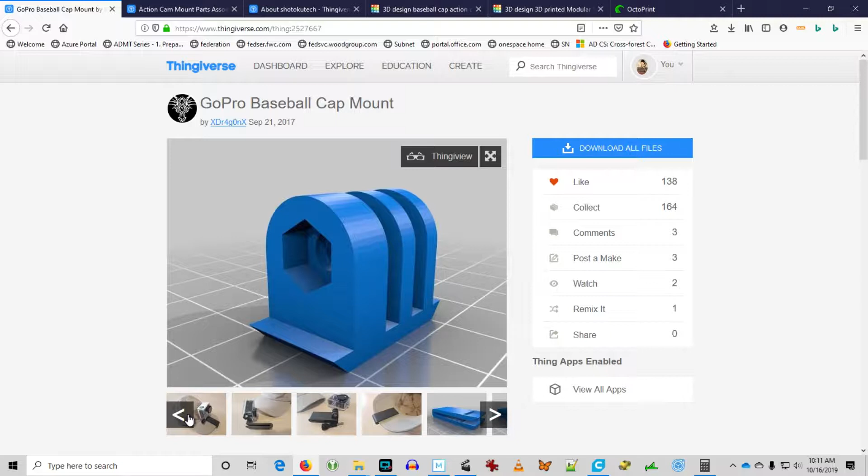We're back on Thingiverse here, and I was looking at this GoPro baseball cap mount, and it's pretty cool, except I'm not going to use the waterproof case. I'm just going to use a small cage that comes with my action cam. And I also want the camera a little closer to the end of the brim.

So we're going to use this clip from this design and use this triple head mount from this action cam mount assortment, and we're going to mash them together and come up with our own new baseball cap action cam mount. And here we go.

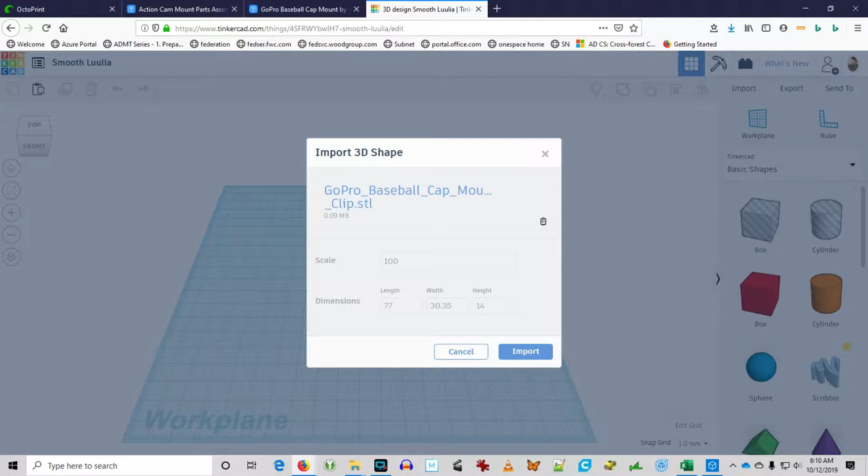So on Thingiverse, in most cases you can download individual parts of a project. So in this case we're just going to get the clip, we'll download it, and once we see that it's down, we can go into TinkerCAD and import it, just like this. Select your STL file, import, and there you go. We have our clip in TinkerCAD now.

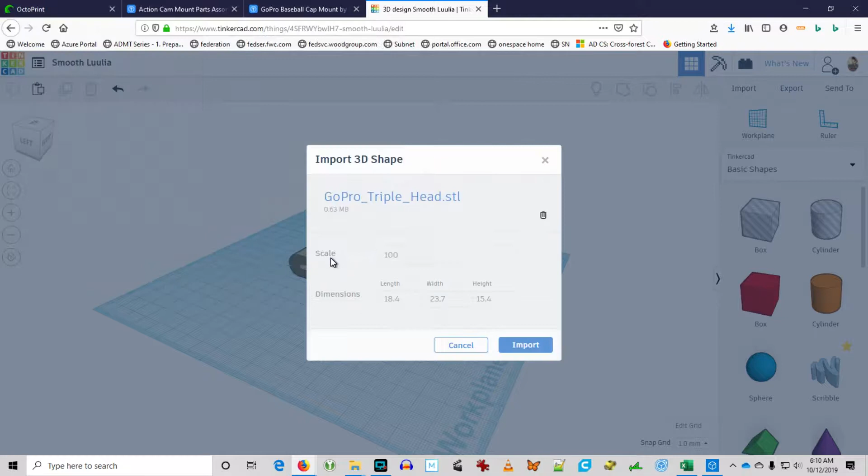Let's go get the triple head mount. Same thing here, download, import the STL file, and there we go. We have the two pieces to our puzzle, and now we'll start to manipulate them. So first we'll want to get this rotated and oriented in a way that we want it, turning it upright.

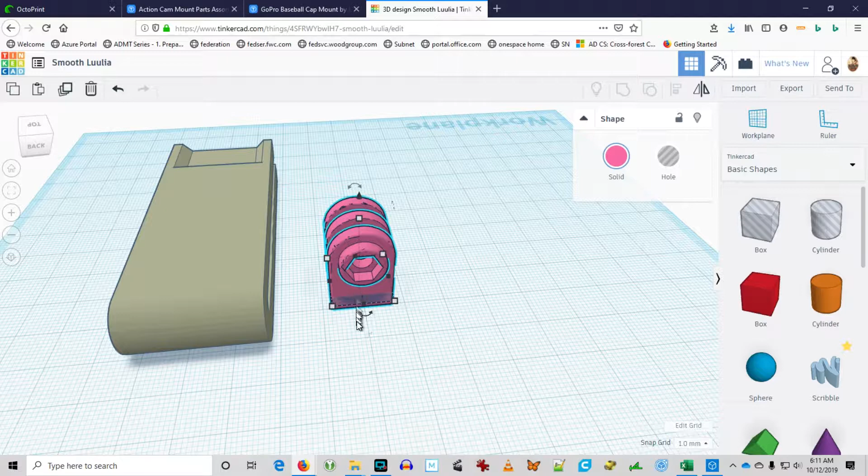I'm going to get the measurement here. We got to raise it 14 millimeters to sit on top of the clip. Finish rotating it, raise it up that 14 millimeters. Trying to gauge some of the other measurements of this object here. The tines and the grooves all appear to be about 3 millimeters thick, and I'm just trying to figure out how wide I should make the clip.

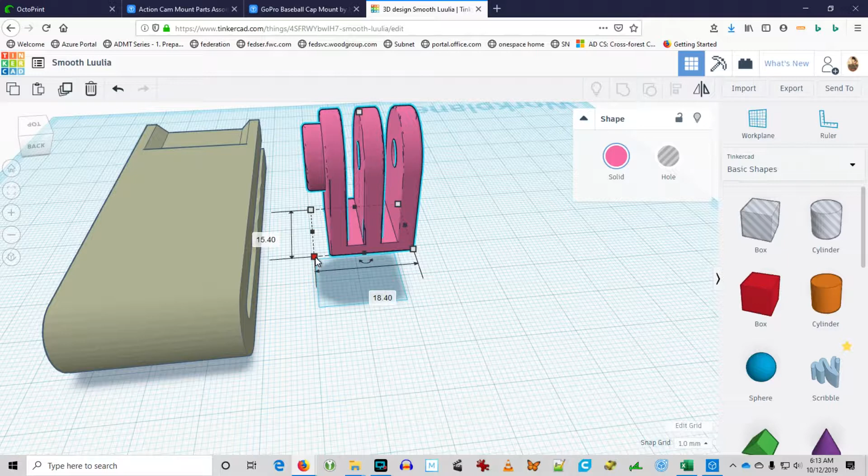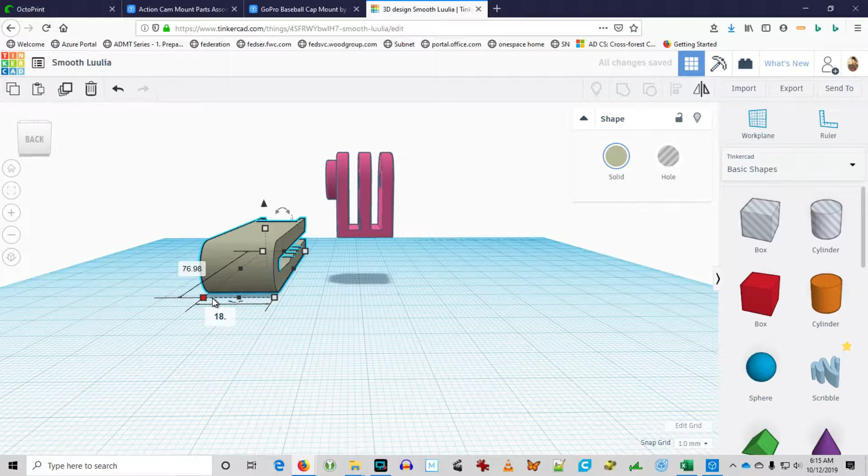So I'm just having difficulty making up my mind. Do I want to make the clip the 15.4 or the 18.4? Notice that there's that nut carriage that overhangs about 3 millimeters off the side of that bracket. So if I make the clip 15.4, that's going to hang over. If I make it 18.4, it's going to be contained within the width of the clip. But let's see which one works out the best.

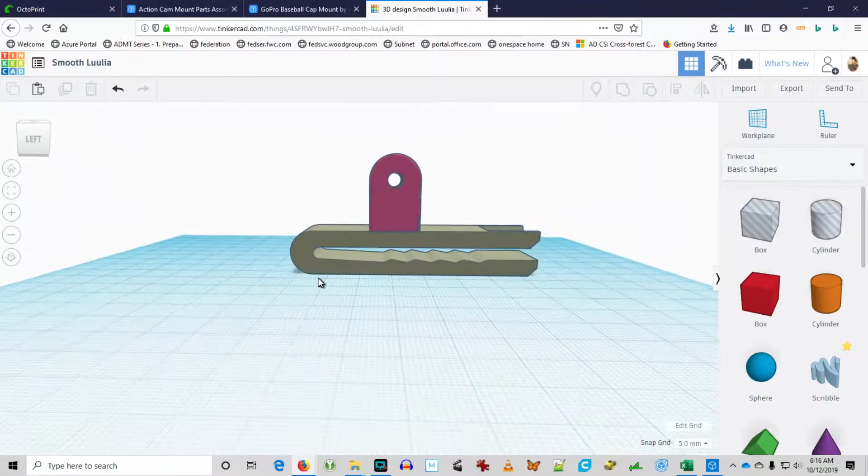The clip being 18.4 wide would cover the whole width of the mount. We'll center, and I'm gonna knock that back about 20 millimeters so that it's not on the end of the brim but not all the way up against the head of the cap. That looks about right. Let's see how this looks.

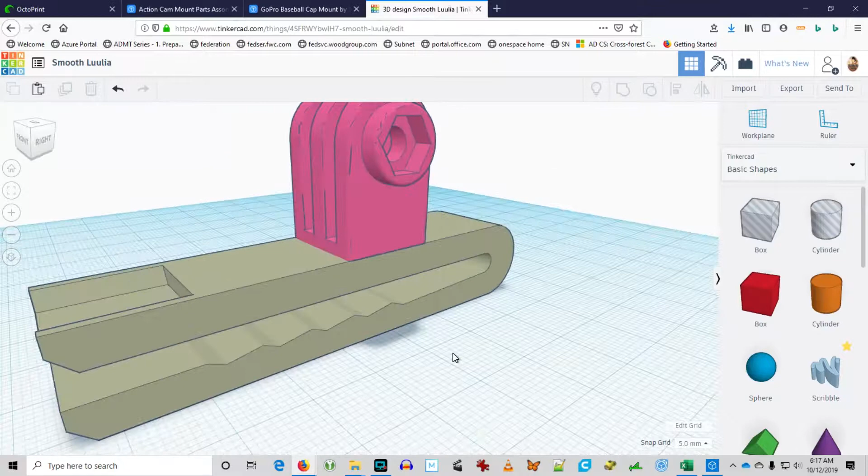And that just looks awkward to have that clip that wide just for the nut carriage there. So I'm going to go ahead and knock it back down to 15.4. That seems to make a lot more sense visually. I'm still in my mind trying to figure out whether I'll print this vertically or lay it on its side. Remember, everywhere there's an overhang, you're going to need to print extra support material.

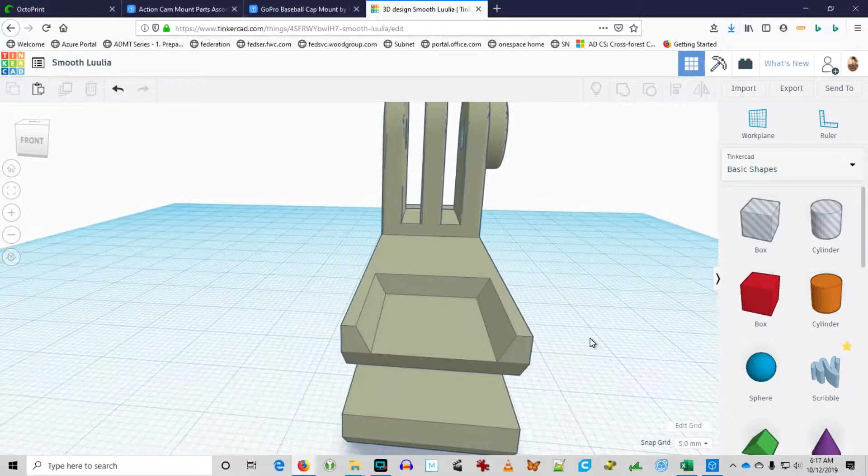Now, cleaning that support material out of the clip will be a real chore, whereas cleaning the support material out of the actual mounting bracket could affect the precision of the mounting bracket. So I'm just kind of eyeing things, trying to figure out what I'm going to do. I also want to take that divot out of the clip, the divot where the original poster was going to glue a triple head mount. So let's see if we can fix that up.

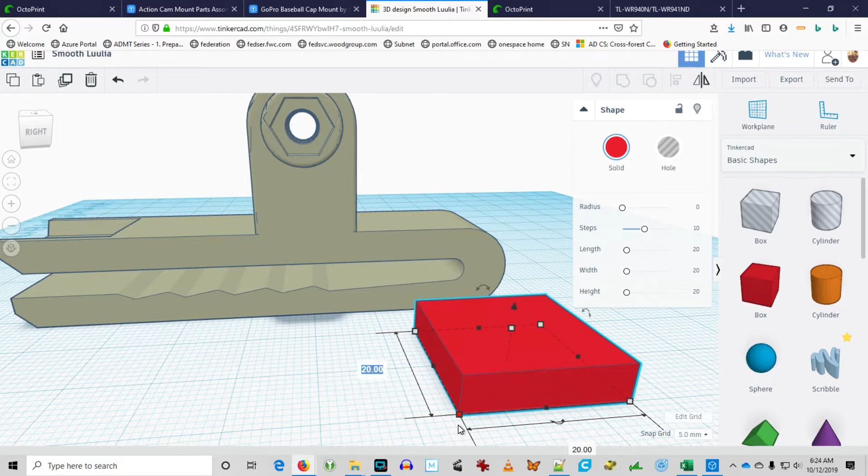Yeah, we'll just get a rectangle here. We know the dimensions, 15.4, and I'm going to estimate that it's about 5 millimeters high. That looks about right. I want to get the mount out of the way while we're doing this. So we'll center and match the top height. That looks perfect. We'll group those together.

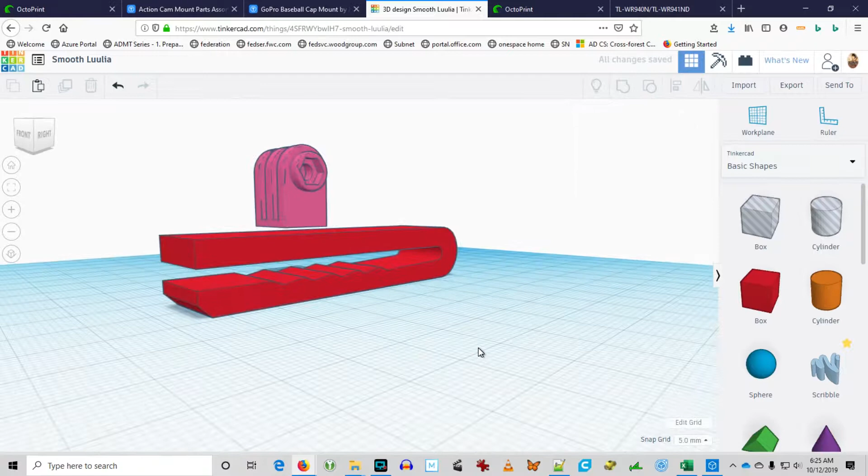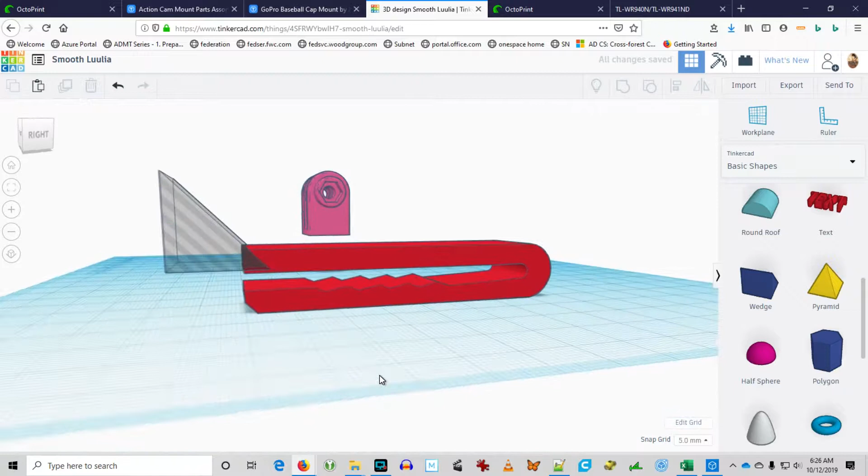I don't like that square end. I like that little angle notch cut out. So let's go ahead and take care of that right now. Bring in a little wedge. I don't need to change the measurements too much. I just need to get it over there and get it in place. Let's turn it into a hole. Center, extreme, and we'll do a little manipulation, sliding things around a bit.

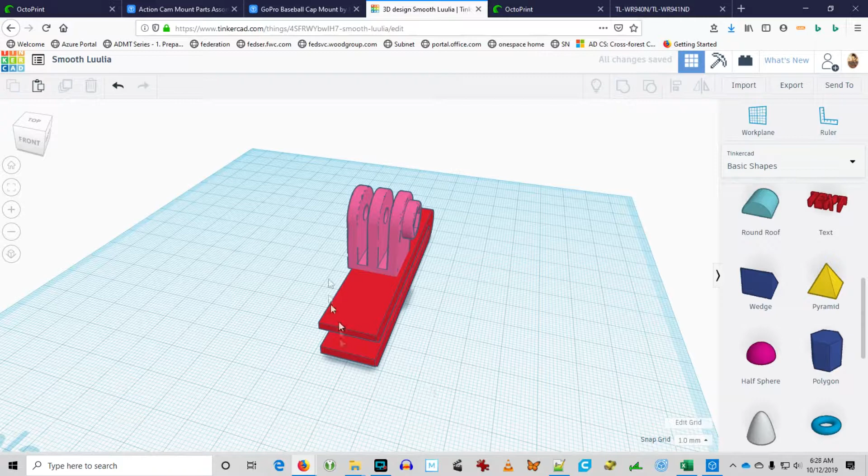Getting closer. And we got to go down a little bit. That looks good. We'll try again. Perfect. Let's group that. There, we got that nice little angled notch back. Now we can finish the assembly here. Center. Line things up. And we'll group it. Okay, there's our finished part.

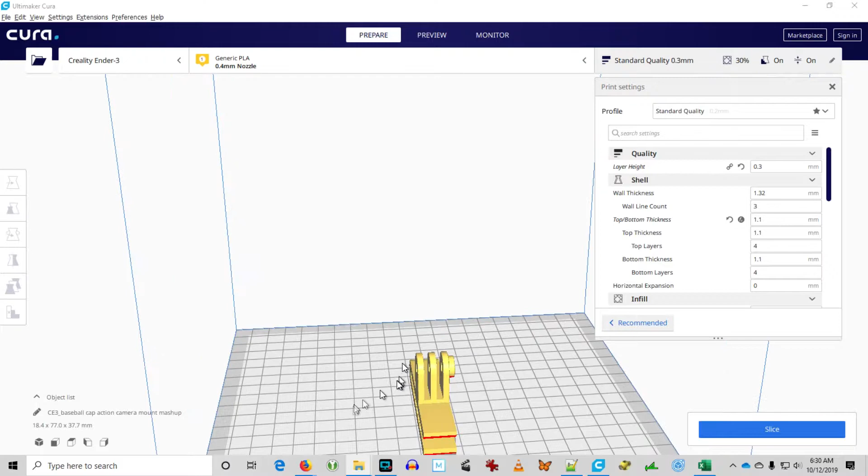Okay, let's look at our slicer settings in Cura. So we drag and drop that in there. The first thing we're going to want to do is rotate it, lay it on its side. I've decided that it would be better to clean the support out of the mount rather than clean the support out of the clip. Okay, let's look at our print quality now.

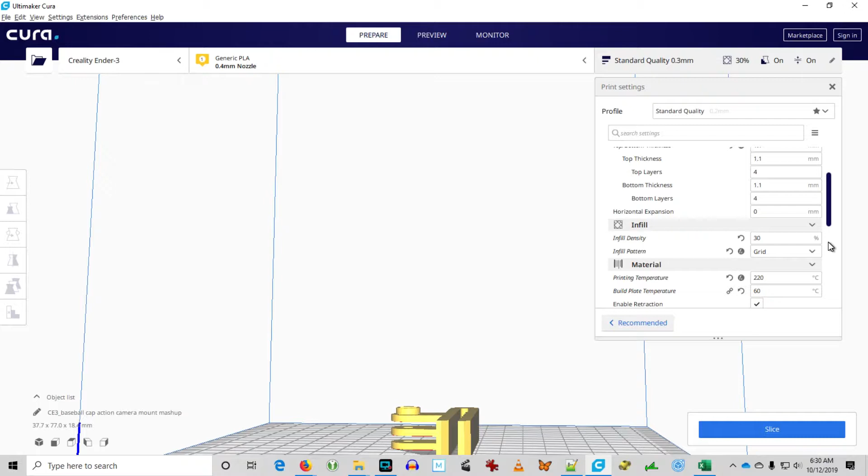You have 3 wall line count, top and bottom thickness is 4 layers, and we're printing at 0.3 quality, so this is a real draft mode. Infill density is 30% with a grid pattern. I'm setting it at 220 and 60. That's what my PLA is going on the Ender, but I'm going to print this in ABS on my Anet. So I'll just manually adjust that in OctoPrint.

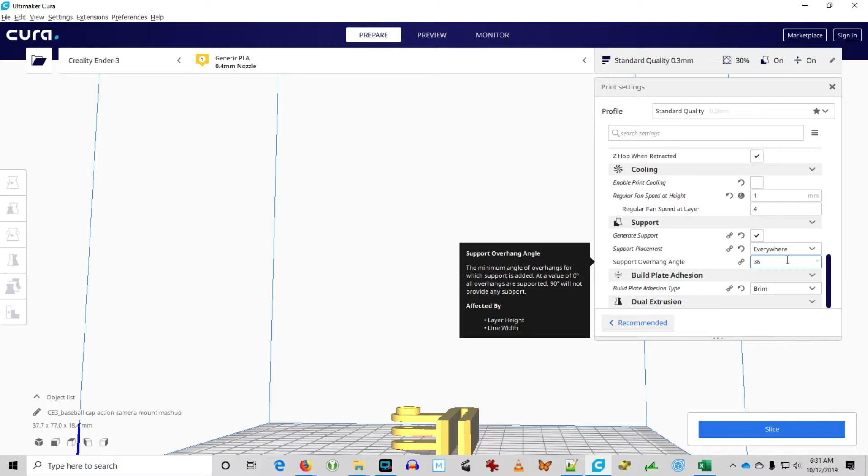We want support everywhere. I've turned the cooling fan off because I am going to do this in ABS and I don't want a bunch of warping. ABS prints at a much higher temperature than PLA. Okay, we're ready to slice. We'll save that file. Now we're going to go into OctoPrint, and you'll see I'll manually adjust the temperatures.

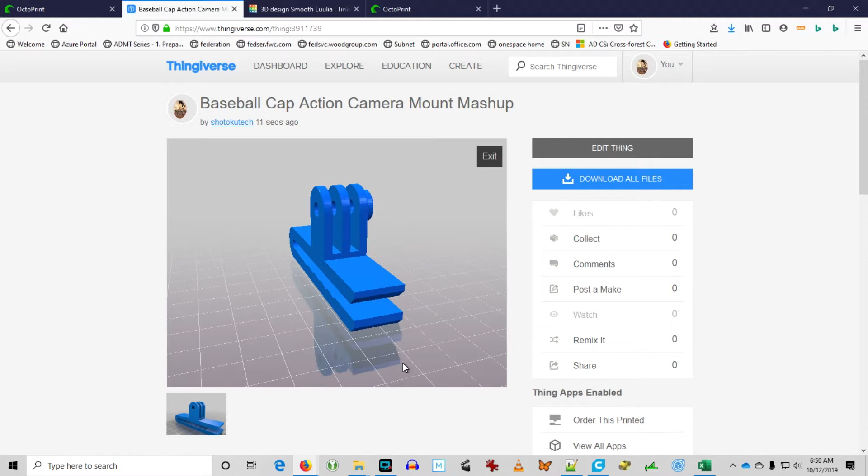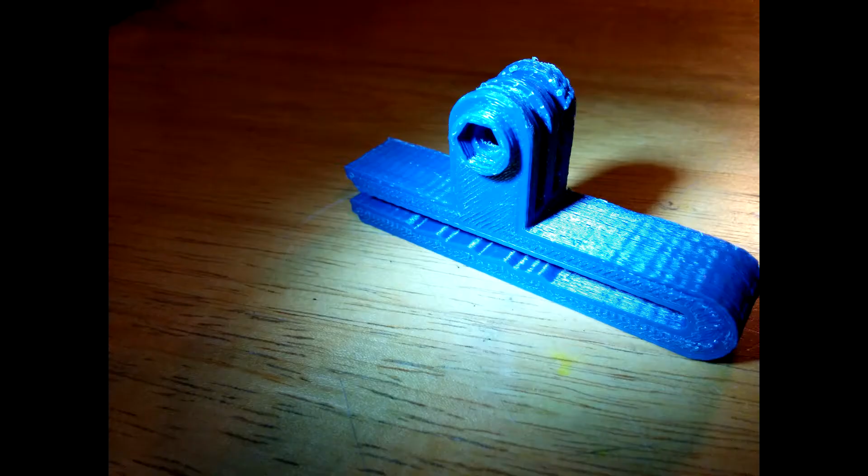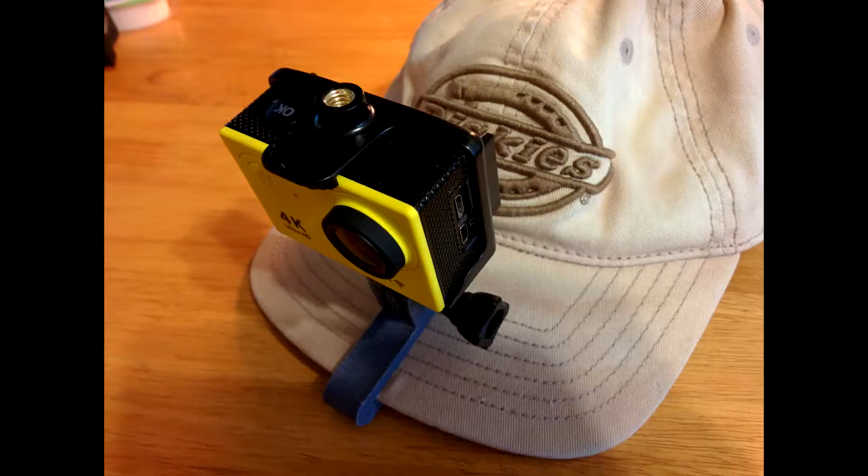Here I'm using the camera's phone app to make sure it's focused on what I think it is, and then I have another camera in my hand and I'm showing you the camera on my head that's focused on the phone that's showing me what the camera sees. Well, there you have it. I think this is going to be a fun gadget even on rocket launches.